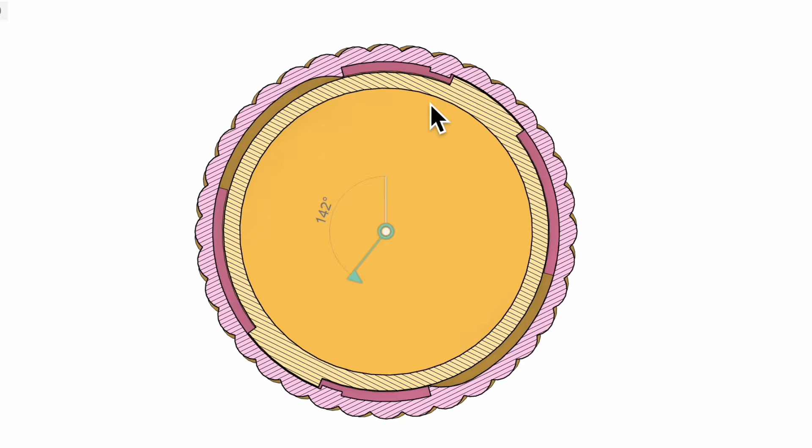I'll walk you through the mechanism, build it step by step, and show you what I learned from testing the printed versions. And stick around until the end. I'll show you how to add the same mechanism to your own model directly in the slicer in about a minute. So let's jump right in.

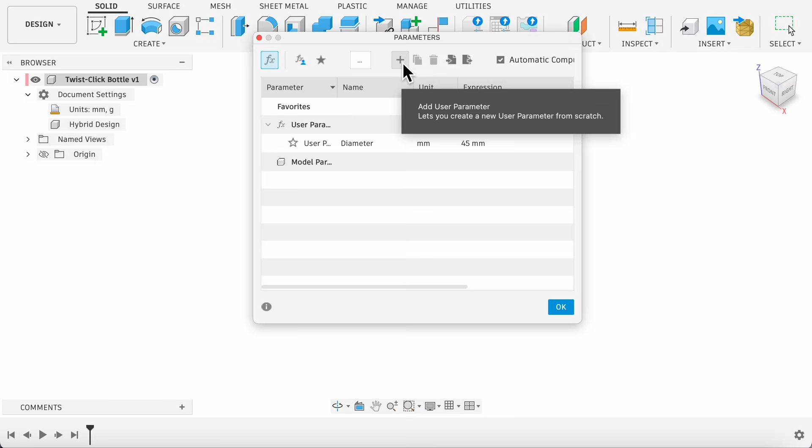First, let's define our main dimensions. Go to the Modify panel and select Change Parameters. Click that plus icon to add our first one. Diameter, 45 millimeters. Next, add height for the container and set it to 30 millimeters.

All right, now let's get started by sketching the outer profile. Go up to Create Sketch and pick the XY plane. Hit C for the circle tool. Start right from the origin, drag it out, and type in diameter. Draw another circle for the inside diameter.

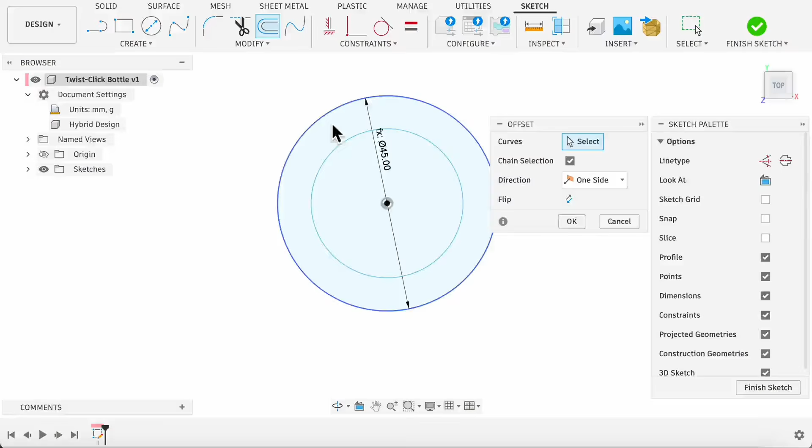Offset it outward by 1.5 millimeters to define the bottleneck. Then offset it another 2 millimeters for the lid. I'm leaving a little extra material on the lid since we'll be cutting the locking slot into it later.

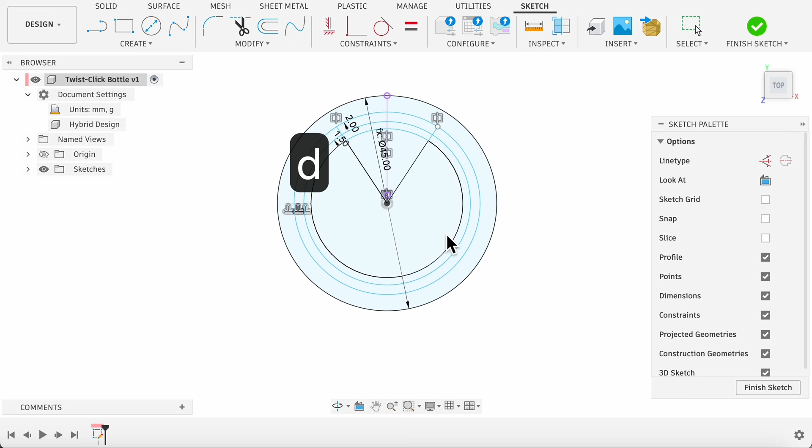Now, let's create an arc pattern for the outer profile. Start with a construction line. Go to Create and use Mirror to mirror it across the Y-axis. Press D for dimension and set the angle between these two lines to 30 degrees. Under Create, find center point arc. Draw the first curve.

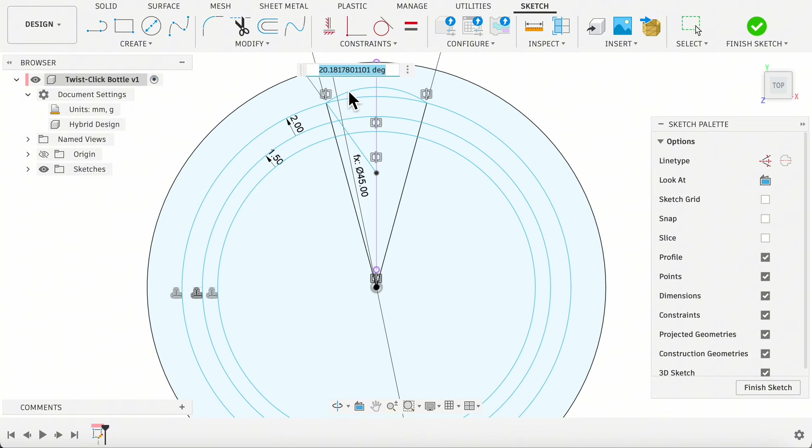Add another construction line, then set the angle to 45 degrees. Apply a tangent constraint here. When all the lines turn black, the sketch is fully constrained.

We don't need to draw every curve by hand. Go to Create and choose Circular Pattern. Pattern the arc around the center point with a quantity of 12. Each section spans 30 degrees, so 12 copies complete the full 360 degrees.

Nice and clean. To make the profile easier to select later, select all the lines that are not part of the final outline and press X to turn them into construction lines. And that finishes our outer profile.

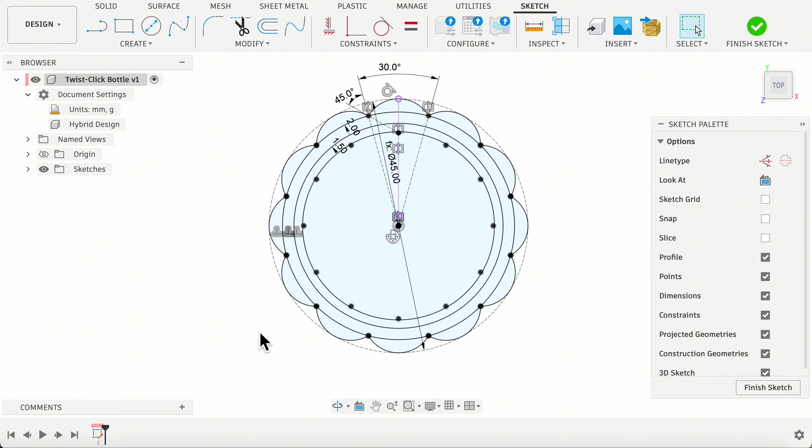Actually, I've just changed my mind. Instead of using fixed stripes in the sketch, let's make this pattern parametric so we can change it later. Open Change Parameters. Add a new parameter called stripes. Make sure it is set to no units. This parameter controls how many vertical ridges wrap around the container. I'll use 12 for now.

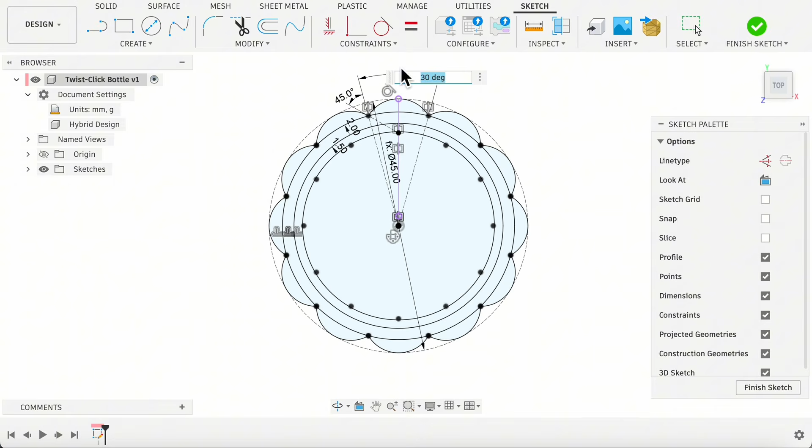Back in the sketch, change the angle to 360 divided by stripes and set the pattern quantity to stripes. Now we can change the entire look of the container by changing a single value in the parameter table. Check for that small lock icon. It means it's fully constrained. Okay, let's finish the sketch and rename it to container.

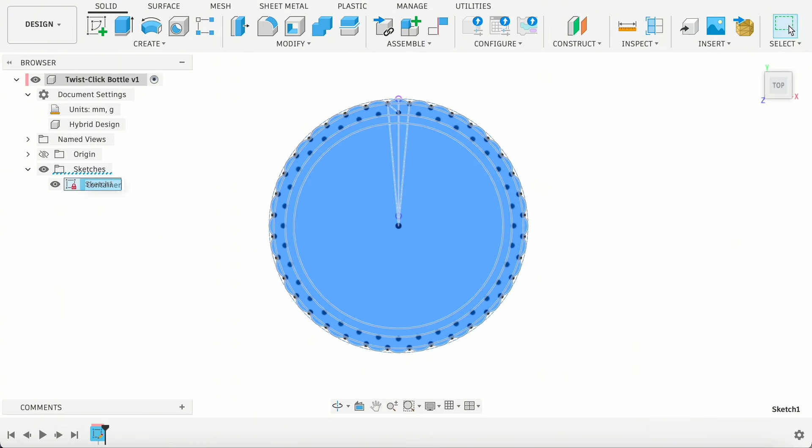Let's build the lid first. Right-click the root component in the browser and select New Component. Rename it to Lid. Press E, select the lid profiles, and extrude them upward by 10 millimeters. Turn the sketch back on.

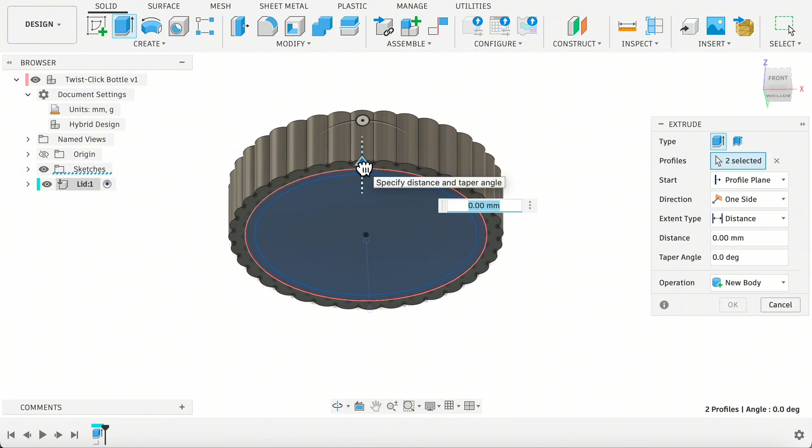Press E again, select these two inner profiles, extrude them upward by 8 millimeters, and make sure the operation is set to cut. That leaves us with a 2 millimeter thick top wall. And the lid is done.

Now let's build the container body. Create a new component named Container. Press E and select the bottle opening. Extrude it upward by 8 millimeters to create the bottleneck. Then press E again, select the body profiles,

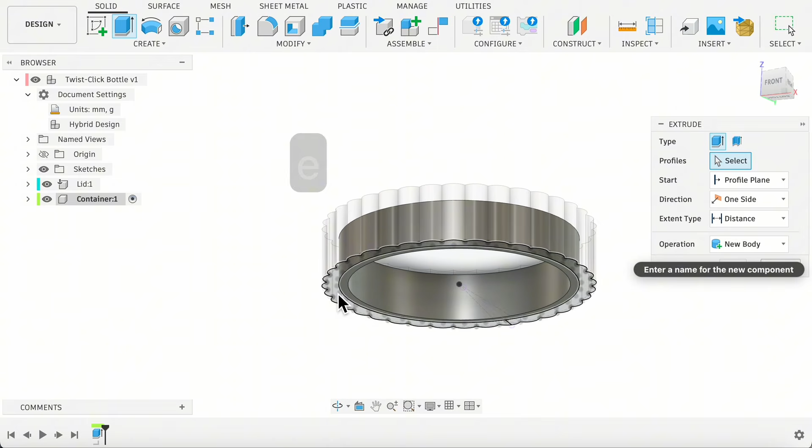and extrude downward using height minus 10 millimeters in the negative direction. The parameter height defines the total model height, so we'll subtract the 10 millimeters already taken up by the lid. Set the operation to join and confirm.

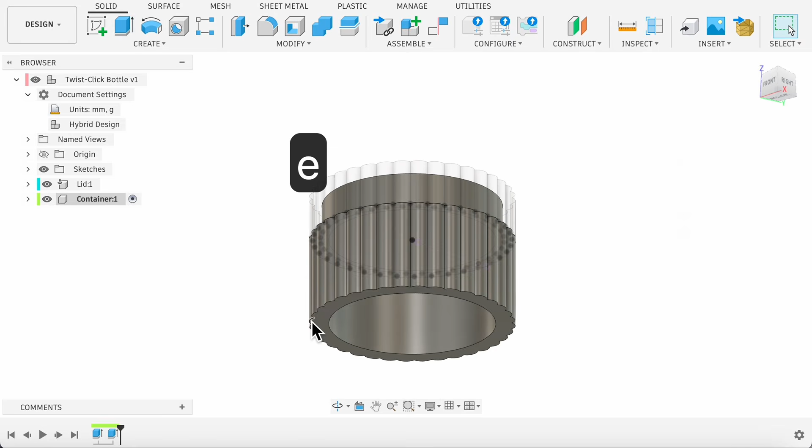The bottom is still open, so press E again. Start from the bottom face and extrude upward by 2 millimeters. Use join to close it.

Now, I'm pressing Shift plus N to turn on component color cycling. This doesn't change the material or the final print. It simply gives each component a different display color, making their relationship much easier to see.

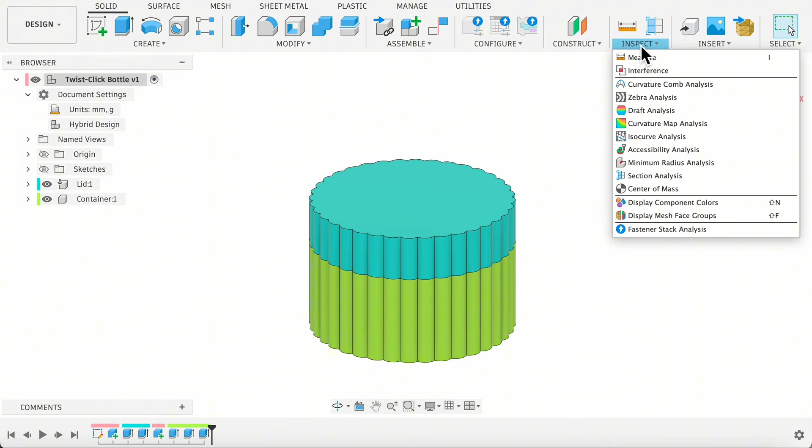To get a better look at the model, let's go to the Inspect menu and select Section Analysis. If you don't see anything, just click Flip. Right now, these two parts are just sitting face to face. We'll add the twist snap mechanism later.

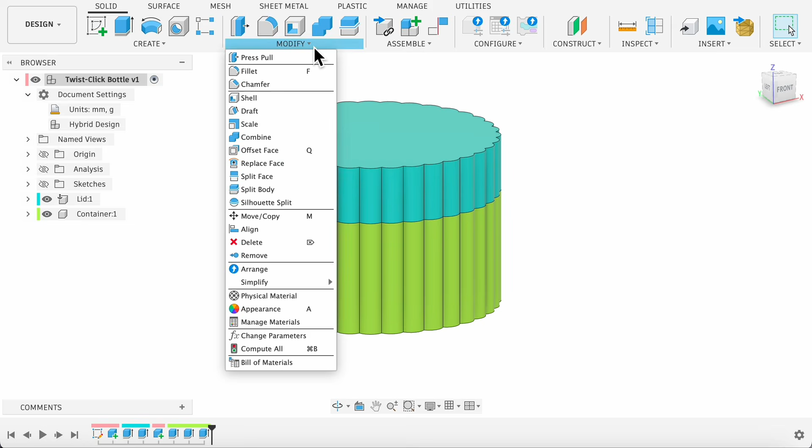Before moving on, let's think about print orientation. We'll print the lid upside down, with its top face flat on the build plate, while the bottle body prints upright. To make the bottom look more refined and avoid elephant foot during printing, I'm adding a small chamfer here. Add a small 0.6mm chamfer to the top and bottom edges.

With this many stripes, each edge is quite short, so a larger chamfer might make the feature fail. Right now, these two parts are just sitting face to face. Next, we're going to build the actual twist-snap mechanism.

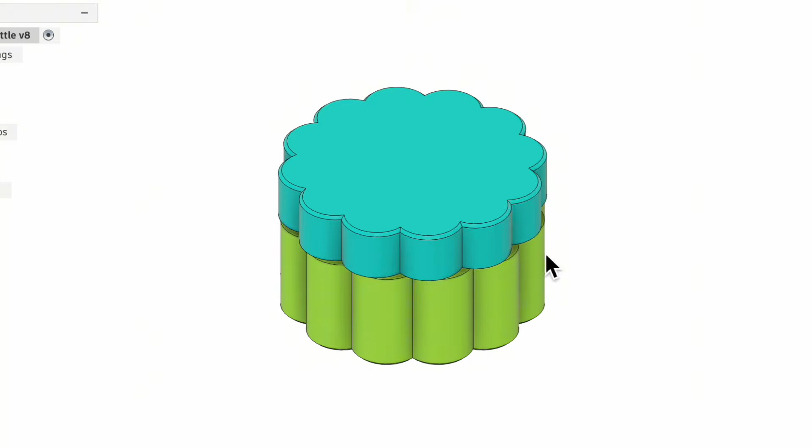Before we go any further, let's see how this twist-click mechanism actually works. First, we have a radial lug on the base part. During installation, you align this lug with the entry slot. Since the slot is slightly wider, it slides right in. Then, as you rotate, the lug follows a curved path until you hit a tiny bump, a detent.

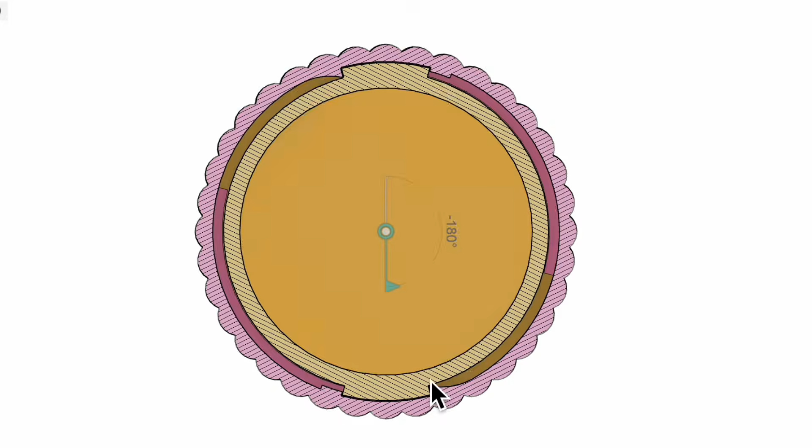With a little extra force, the plastic flexes just enough to let the lug snap over it. The moment the lug snaps past that point, you'll get clear tactile feedback. That's the click sound we're looking for. Once the lug snaps into the locking zone, there's a much higher hard stop wall right in front of it. This wall is too high to be pressed over with normal force, so the lug can't rotate any further, effectively locking it in place.

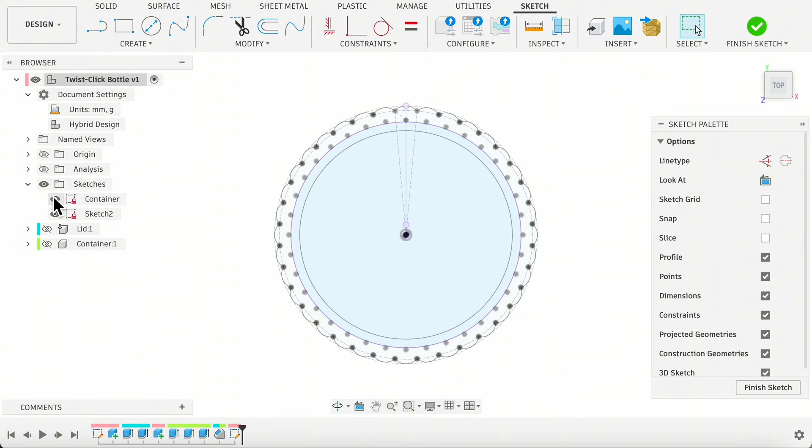All right, let's start by creating a sketch on the XY plane. Press P and project the interface between the container and the lid. Hide the container sketch for now. We'll start with the lug. Draw a line from the origin and mirror it across the y-axis. Under Create, choose Center Point Arc.

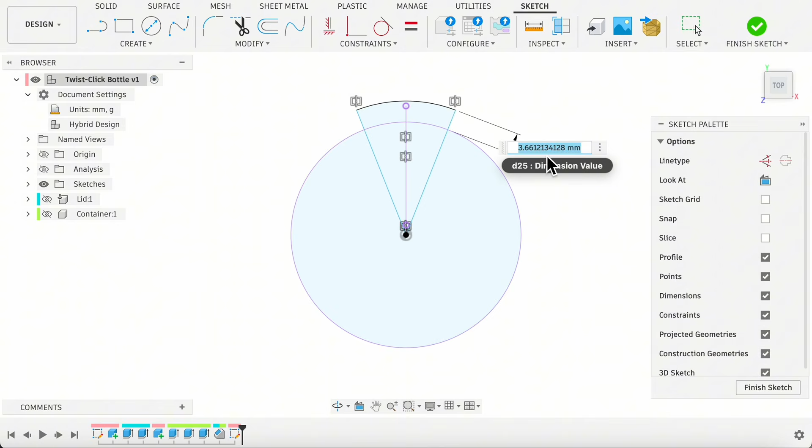Draw a short arc. Press D and set the distance between the two arcs to 1 millimeter. This defines the height of the lug. Also, set this angle to 30 degrees. Now, everything looks fully defined. Okay, let's finish the sketch and rename it to lug.

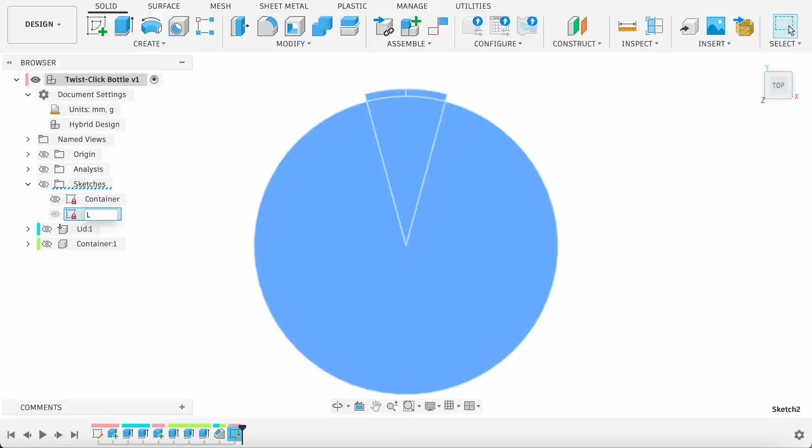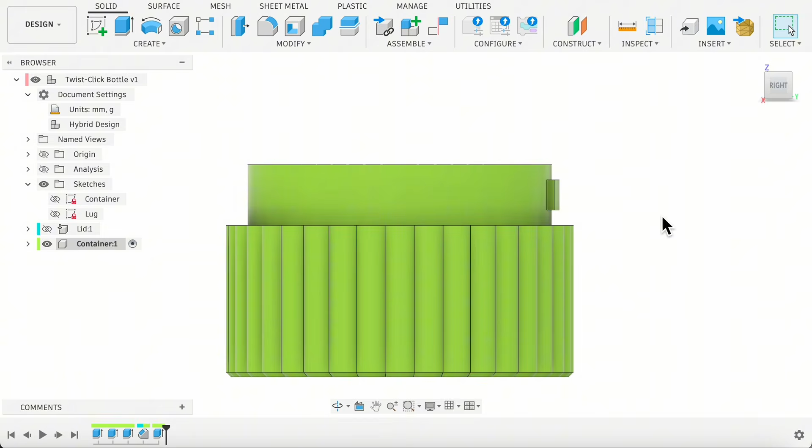Back in the container component, extrude the lug profile from a plane 2 millimeters above the sketch. Give it 4 millimeters of height and join it to the body. From the side, you can see the lug would start printing in midair, so it'll need support. To avoid that, add a 1 millimeter chamfer to the top and bottom edges. Now the lug can print cleanly on its own.

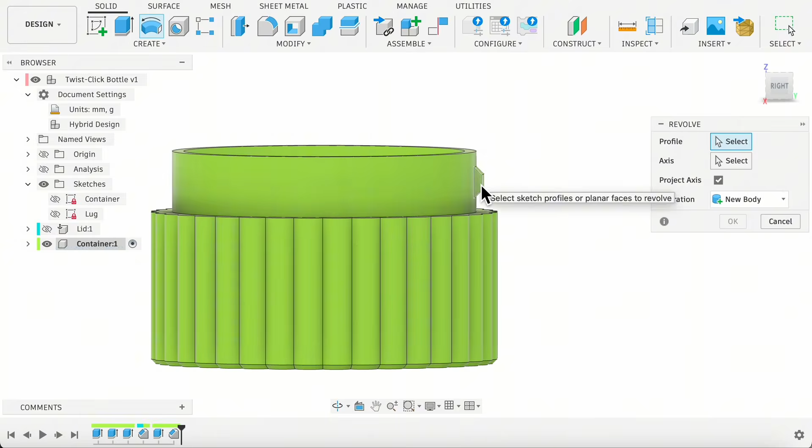Next, we'll create a matching groove in the lid. Instead of redrawing it from scratch, here's a shortcut. Use the lug itself as the cutting profile. Let's use the revolve tool. Pick the Z-axis as the revolving center. Set it to full and operation to cut.

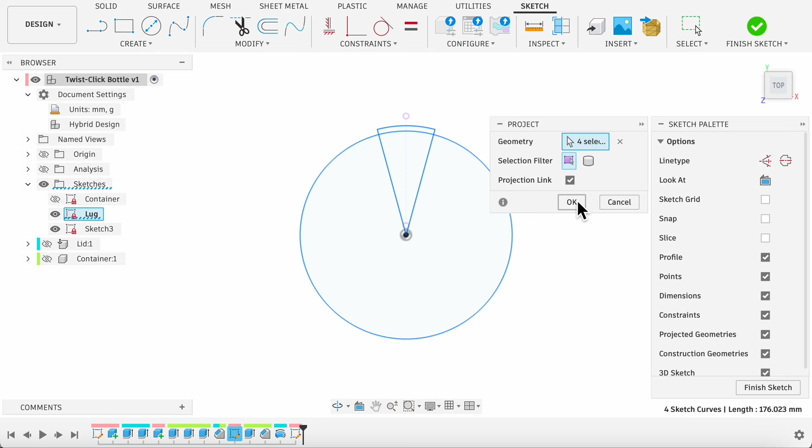The lug has room to move now, but it needs an entry slot to get started. Plus, we're still missing the hard stop here and the detent. Create a sketch on the XY plane. Press P and project both the lug and its mating surface. Then press C and draw a circle as the groove profile.

Next, we're going to draw the detent. Draw a line from the center to the edge. Then use the center point arc to snap to the center and draw a short arc. Set the detent depth to 0.4 millimeters.

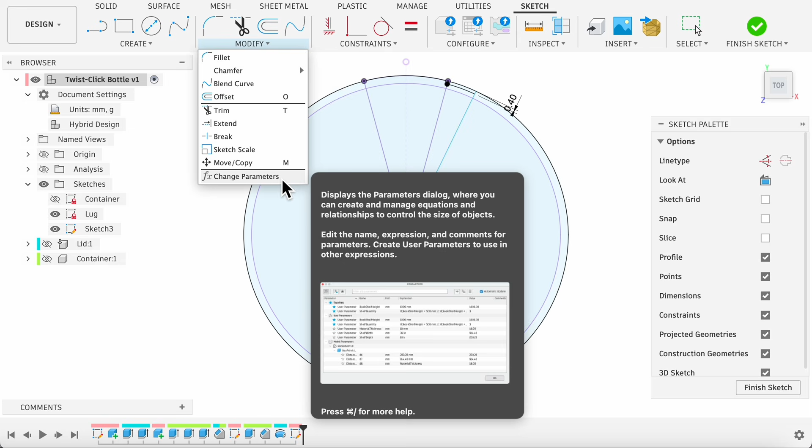I think I'll make that value parametric so the tactile snap is easy to tune later. Open change parameters, add a parameter called detent, and replace the fixed value with this new parameter. Finally, set the detent width to 2 millimeters.

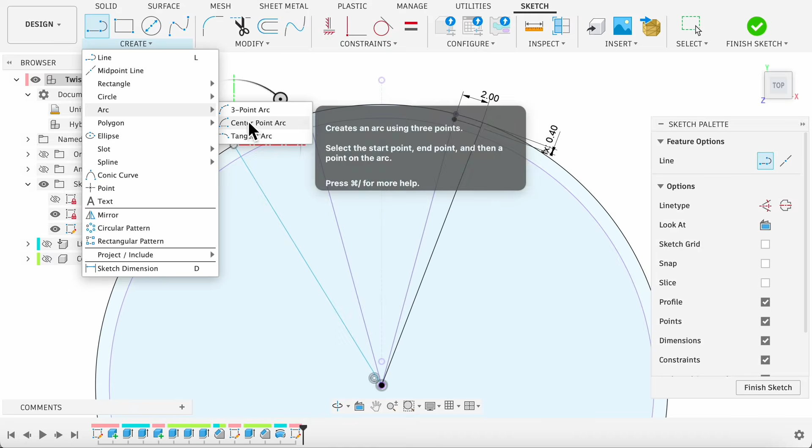Now, let's build the hard stop on the other side. Add a construction line. Draw another center point arc. Constrain the arc endpoint to the root of the lug and also to the circle. Use shortcut D to set this angle to 15. Draw one last line to define the width of the entry slot and set that angle to 45 degrees.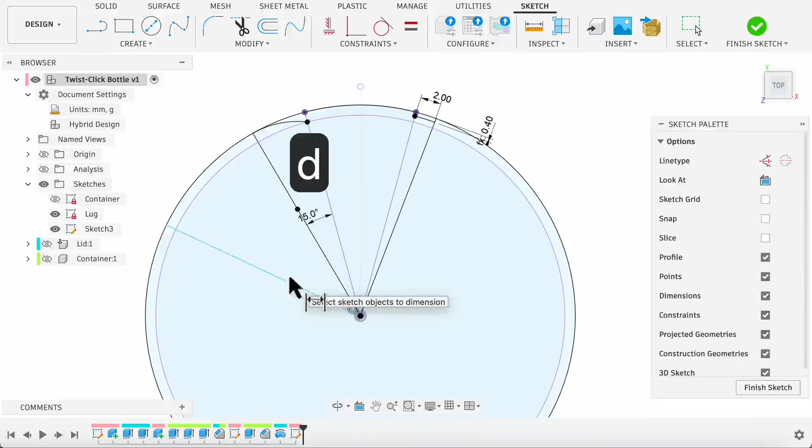Select the lines that are not part of the final profiles and press X to turn them into construction lines. Everything looks fully defined. Okay, let's finish the sketch and rename it to slot. With that sketch ready, we can turn each profile into a functional part of the slot.

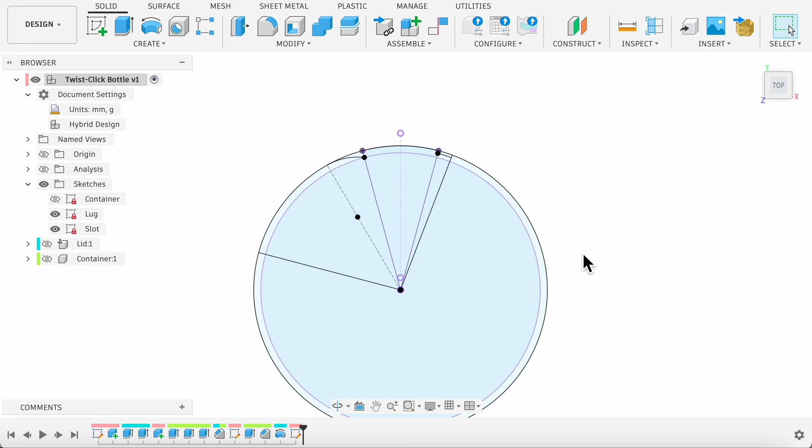Hit shortcut E to cut the entry slot. Select this profile. Set the extent type to object. Select this face as the target and set the operation to cut. That creates the entry slot.

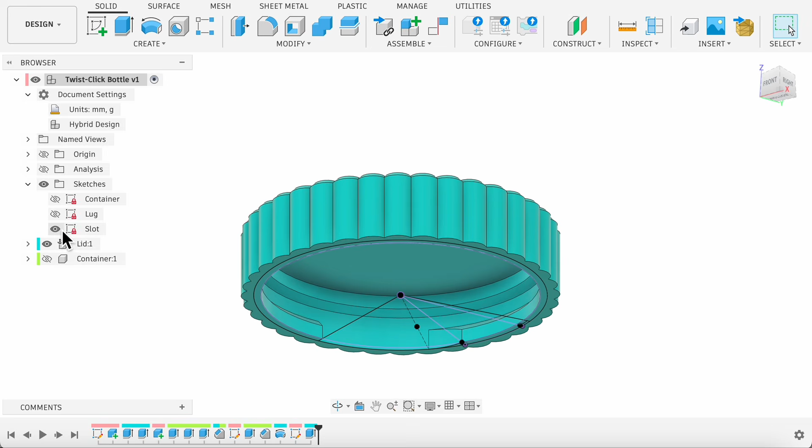To add the detent and the hard stop wall, let's hit shortcut E to extrude again. Select the small bump and the end profile. Set the start to object. Select the top face and use join.

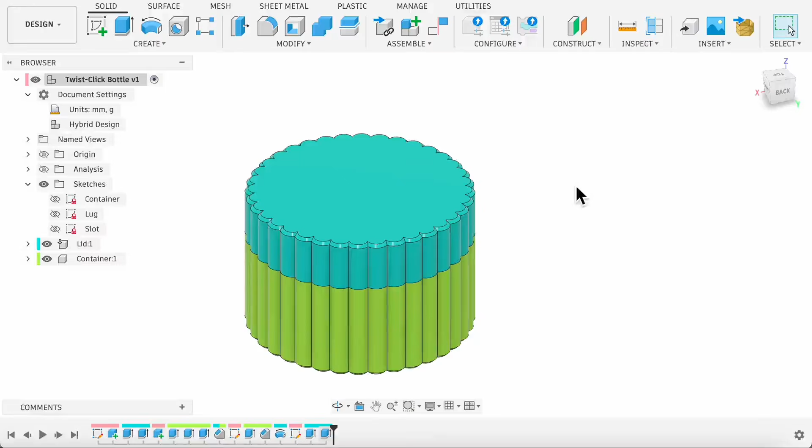To get a better look at the twist snap mechanism, let's go to the Inspect menu and select Section Analysis. Pick the XY plane and drag it up. The entry slot, detent, and hard stop are all in place, so the locking geometry is complete.

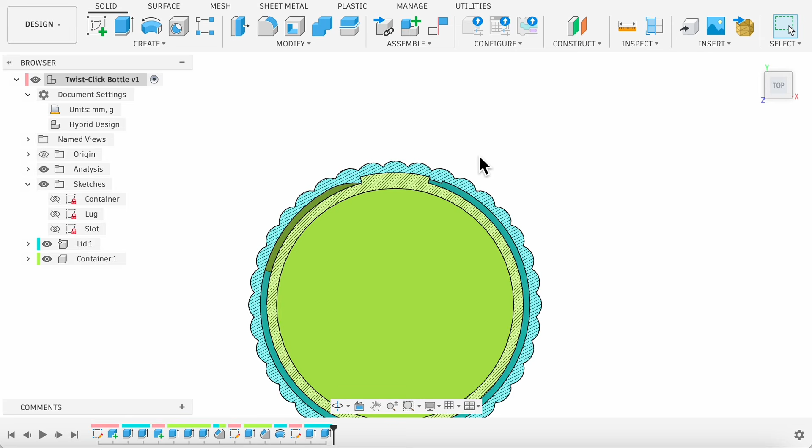But before we print anything, we need to add some clearance between the moving parts. Let's start with the lug on the container body. Grab the offset face tool or hit shortcut Q and enter -0.1 millimeters. Then hit F for fillet, add a 0.5 millimeter fillet to the lug edges to make it glide easily in that groove.

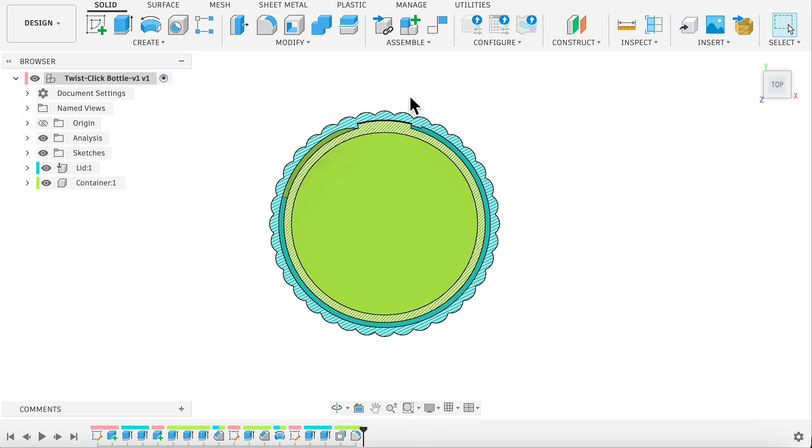And just like that, our twist snap mechanism is finished. With only one locking point, the lid could pivot around it and all the twisting load would be carried by a single lug. We want support on both sides, but luckily we don't need to model the whole mechanism twice.

Let's head up to Create, then Pattern, and grab the Circular Pattern tool. Make sure your object type is set to Features, because we want to grab those specific steps from our timeline. The steps that create the entry slot, the hard stop, and the detent. Pick the Z-axis as your center, and set the quantity to 2.

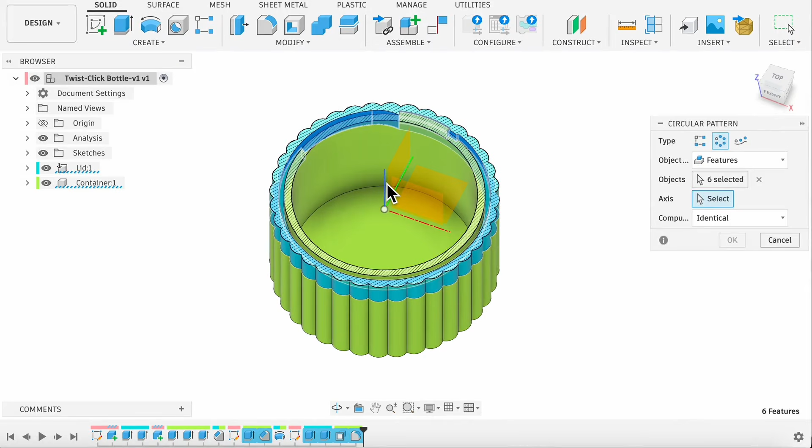For a lightweight project like this, 2 lugs are plenty. It's clean, symmetrical, and gets the job done. Of course, you could always crank up the quantity in that circular pattern to 3 or 4, but honestly, 2 is just enough. Now let's isolate the lid and add clearance there as well.

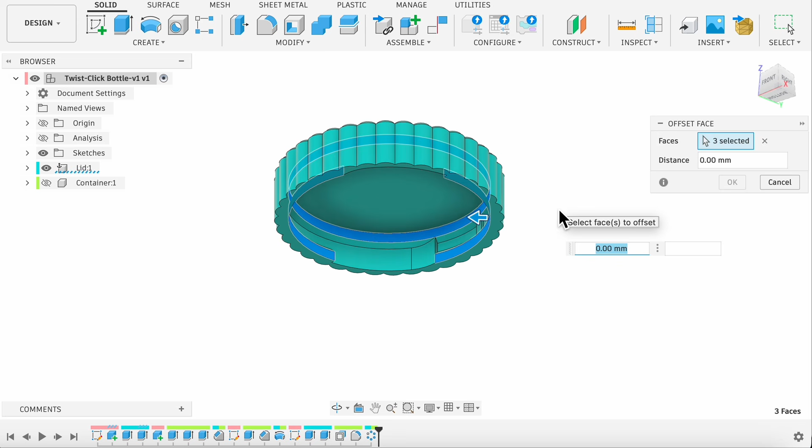Press Q, select the mating surface around the bottle neck, and offset it inward by 0.1 millimeters. Let's take another look with the section analysis. Now there's clearance between the lid and the bottle body. Let's assemble the parts so we can test the motion properly.

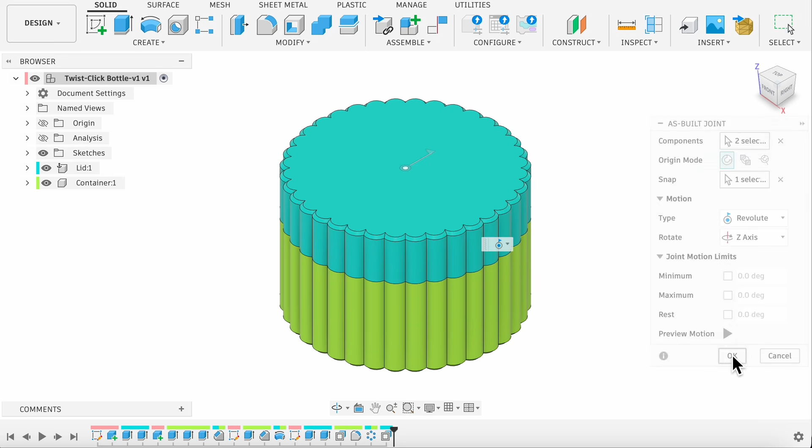Go to Assemble and choose As-Built Joint. Select the lid and the bottle. Set the motion type to revolute. Choose the center axis. Turn the section analysis back on. Now drag the lid to see how everything moves.

As you rotate, the lug follows the groove until it hits a small bump. With a little extra force, it snaps right over that detent with a satisfying click. Now it's in the locking zone, stopped by a higher wall and locked perfectly into place. With the modeling finished, now we get to my favorite part, the magic of parametric control. This is where all that setup finally pays off.

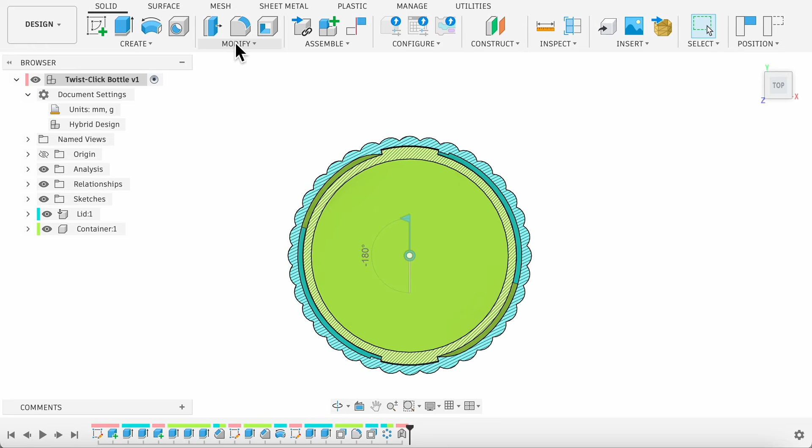Open the parameter table. Let's start with detent. This one controls how the twist snap clicks into place. If the detent is too low, it'll twist in too easily, but it might be too loose to stay locked. If it's too high, it'll be hard to twist. You might need way too much force, or it might not clear at all.

Now let's look at the other parameters. Diameter changes the overall width. Height changes the overall height. Because the lid stays fixed at 10 millimeters, most of that height change happens in the bottle body. The stripes parameter is the interesting one. Lower values create broad petal-like lobes. Higher values create finer vertical ribs. I'll use a smaller set of dimensions for a faster test print.

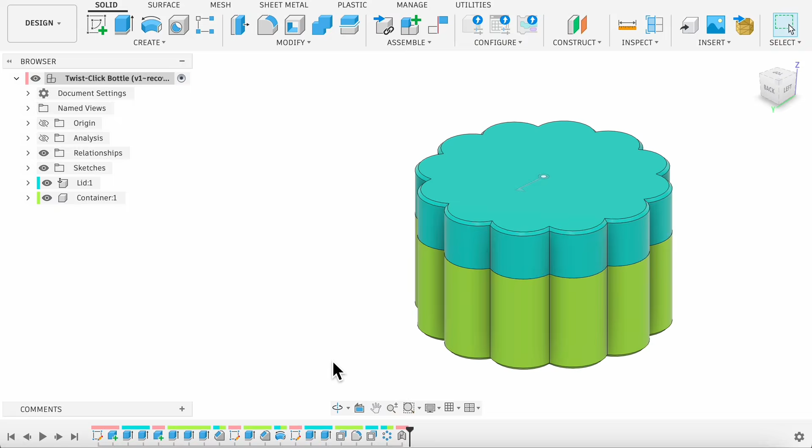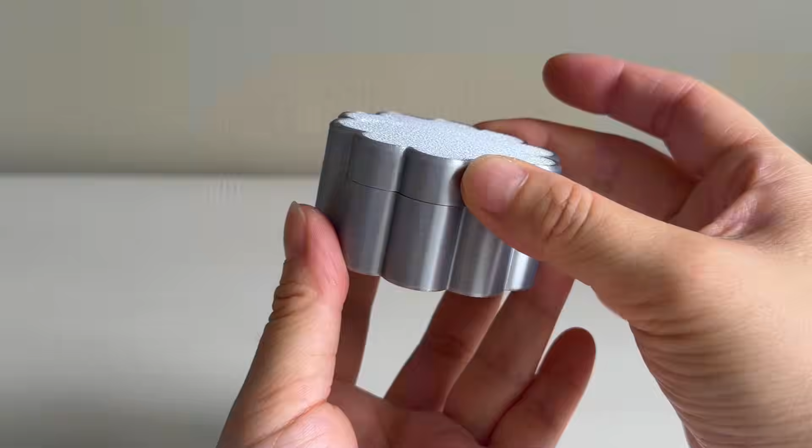Here's the final print. Let's try the mechanism. Align the lug with the entry slot and rotate. Right here, I'm feeling a bit of resistance. Give it a tiny bit of force, and with a satisfying click, it locks right into place. But listen to this, it rattles. I only added 0.1 millimeters of clearance, and I couldn't find anything wrong with the model.

So I printed the exact same model in a different filament. And suddenly, the fit was perfect. Same model, different filament, totally different feel. So materials shrink and flow differently. You may need to tune the clearance for your own printer and filament.

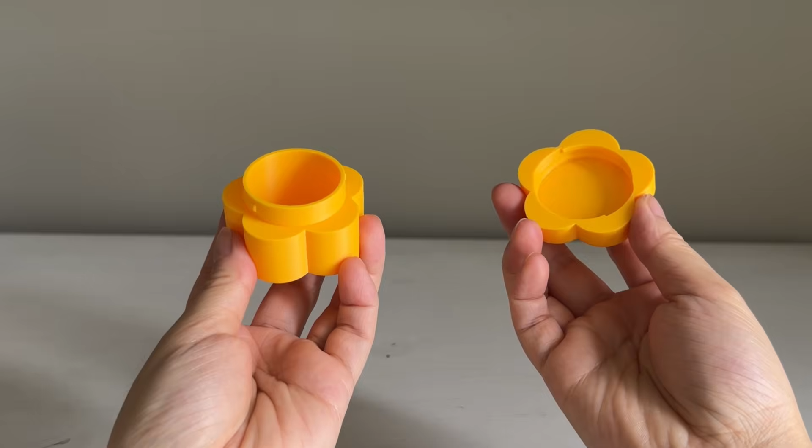I also printed a 5-stripe version, which looks more like a flower. But something strange kept happening. Sometimes the petals lined up perfectly after the click, and sometimes they didn't. So I went back to Fusion to find out why. If this lug enters the intended slot, the lid rotates into perfect alignment.

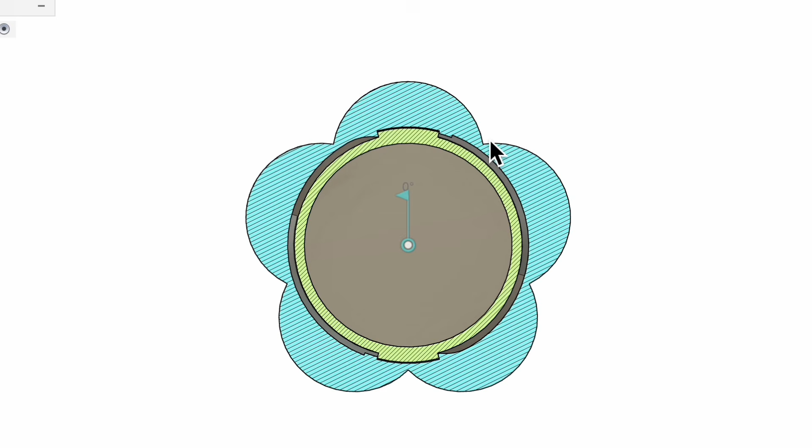But because the two locking interfaces are directly opposite each other, the same lug can also enter from the other side. With 5 stripes, the lid still locks, but the petals end up misaligned. It might seem like a tricky problem, but the solution is surprisingly straightforward. Break the symmetry so there's only one way to put the lid on, and the actual edit only takes a few steps. Double-click the circular pattern in the timeline.

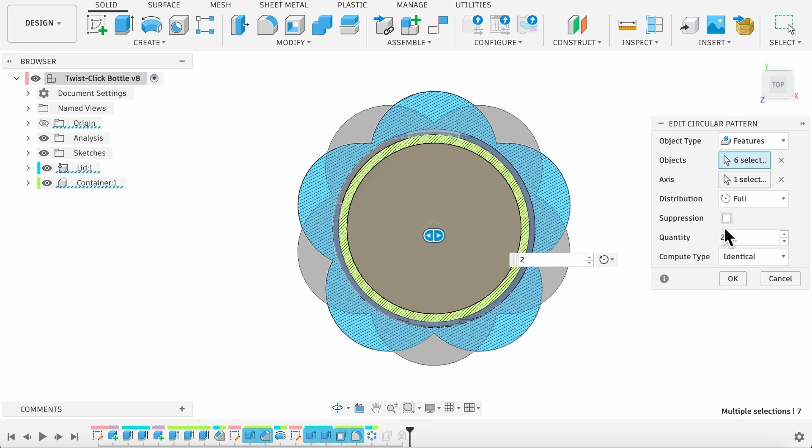Instead of distributing the two mechanisms evenly, switch distribution to partial and set the angle to 170 degrees. That changes the angle between the two mechanisms from 180 to 170. We don't want to shift it too far, though, or the lugs won't distribute the load as evenly. Let's check if the alignment works now.

Our goal is for this lug to enter here, rotate through the slot, and lock here. So let's line it up with this entry slot. But the problem is, the opposite lug is not lined up with its entry slot. In other words, the entry slot is on the wrong side.

Because the lid twists into the joint from the opposite direction, this matching slot needs to be at negative 170 degrees. So, let's go back to the circular pattern. In the selected features, remove the entry slot extrude.

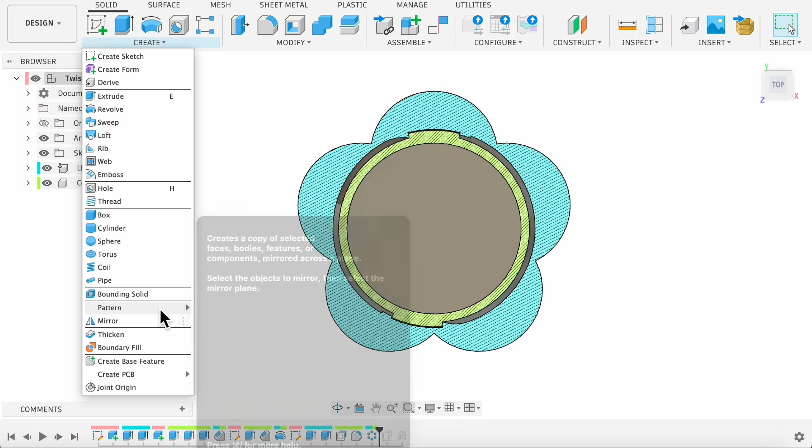Then create a separate circular pattern for the entry slot. Select that extrude in the timeline and use the Z-axis. Set distribution to partial, and importantly, enter negative 170 degrees.

Now let's check the alignment again. The slots are here and here. Notice that the one on the right has moved from here to here. When this lug enters its slot, the lug on the opposite side lines up at exactly the same time. Now both can enter and rotate all the way into the locked position.

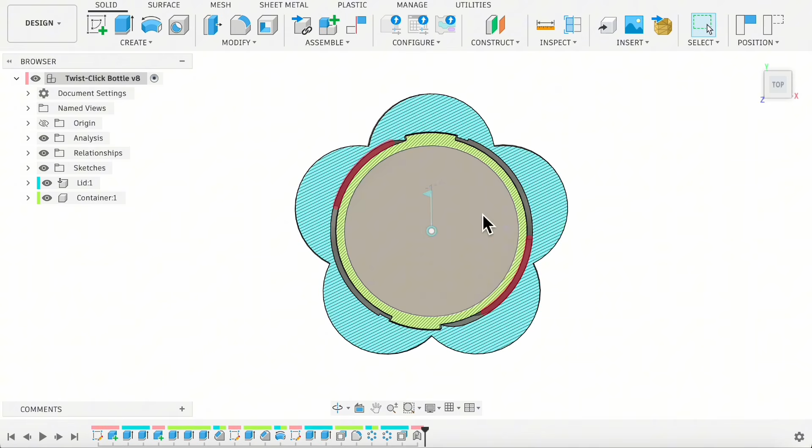If you try the other entry slot, one lug can start to enter, but the other lug hits a wall, which is exactly what we want. The opening is still a little generous, though, and with enough force, it might still squeeze in. So for better foolproofing, we should narrow the entry slot so the lid simply can't assemble in the wrong position.

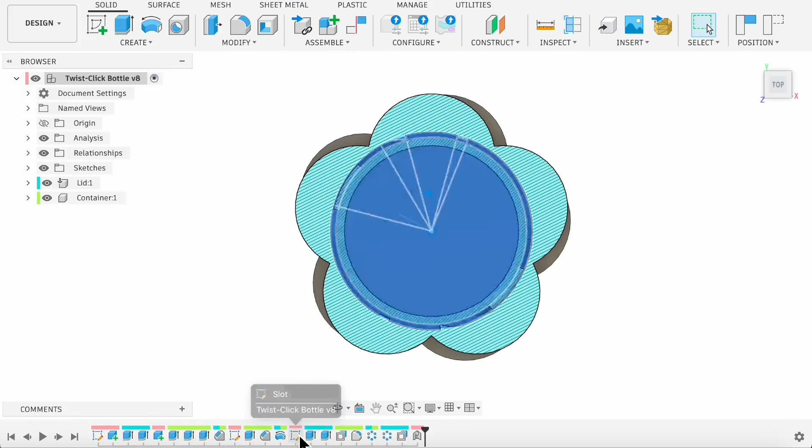Go back to the timeline and edit the slot sketch. Make the entry slot smaller, like change it to 35 degrees. That's just wider than the 30-degree lug, but not wide enough for the lid to slip in from the wrong position. Now, the entry slot is tighter than before. If we check it, these two lugs cannot enter the slots at the same time from the wrong position. But when they rotate to the intended position, both sides line up and lock into place.

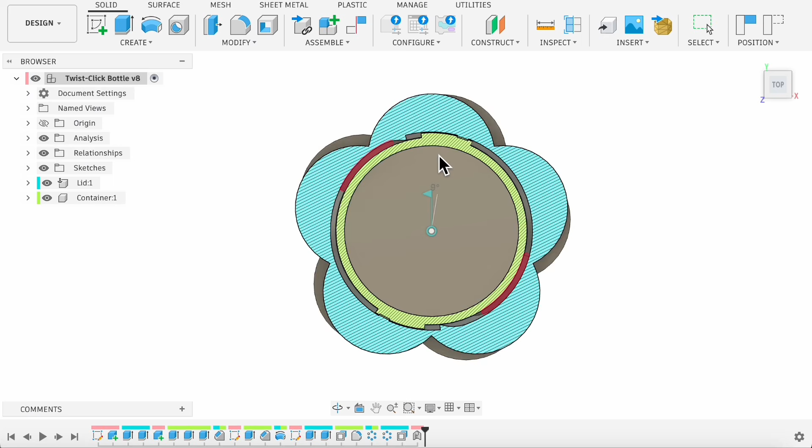Here's the updated print. At first glance, it looks almost the same. From this angle, though, you can see the change. The two interfaces aren't directly opposite each other anymore. Let's see if it works. Perfect. Now there's only one valid way to assemble it.

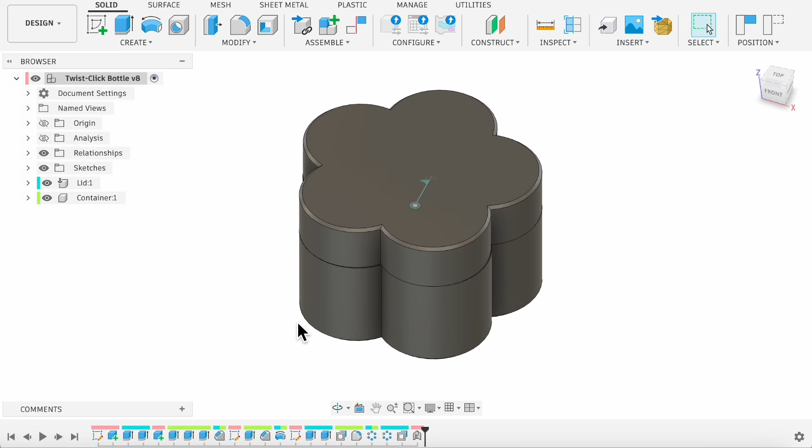This mechanism finally works, but I know rebuilding it from scratch for every new project would be tedious. So I created a twist snap cutter and uploaded it to MakerWorld. Let me quickly show you how to use it. Here I've got a solid elliptical container measuring 60 by 50 by 30 millimeters. Instead of rebuilding the twist snap mechanism from scratch, I'll use the cutter to add it. Let's go back to MakerWorld and customize the cutter to match those dimensions.

We'll start with inner diameter. Measure the narrowest part of the cutting surface, then subtract at least 7 millimeters. So 50 minus 7 gives us 43 millimeters, and a slightly smaller value is fine too. Next is detent depth. Think of it as the size of the little speed bump the lug has to cross. Larger means a stronger click and more turning force. I'll keep the default 0.4 millimeters.

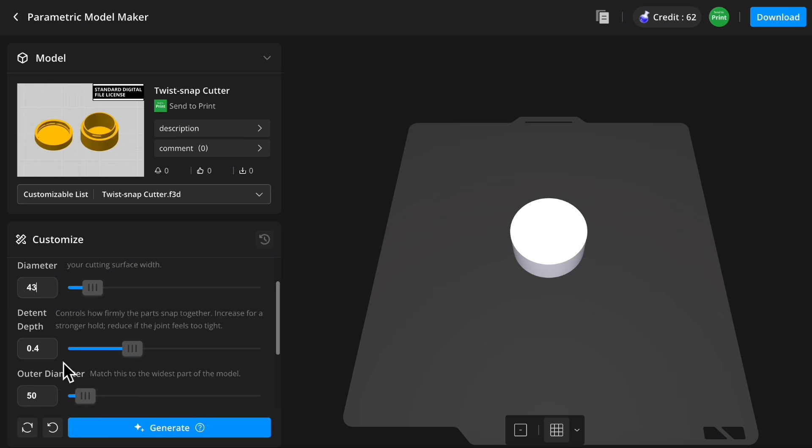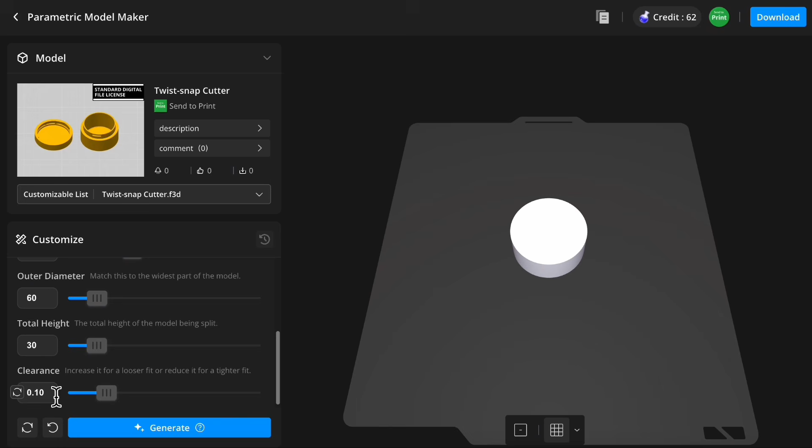Outer diameter should match the widest part of the model. Our cross section is 60 by 50, so enter 60 millimeters. Total height is simply the full height of the model, so enter 30 millimeters here. Finally, clearance controls the fit between the moving parts. The default 0.1 millimeters is a good starting point. If the fit is too tight, increase the value slightly. If it's too loose, reduce it down to a minimum of 0.05 millimeters.

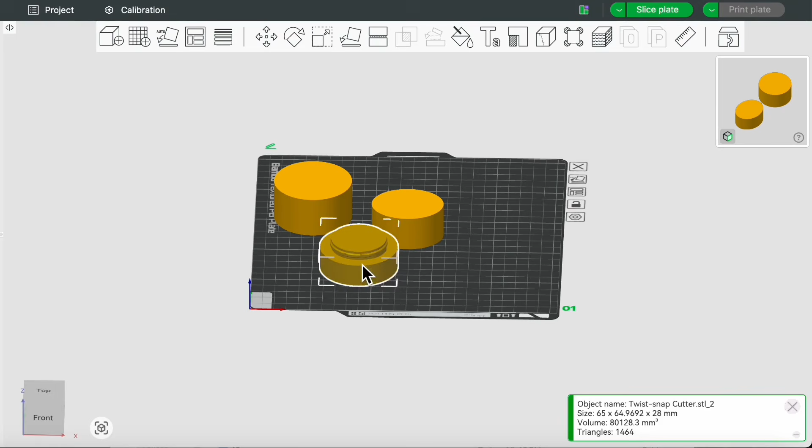Okay. It may look like nothing changed. Don't worry, the important geometry is hidden inside. Just download the file and put it to work. Back in the slicer, drag in the STL. Then right-click and choose Split to Objects. The cutter is made of two separate parts, one for cutting the lid and one for cutting the body. These are the two cutter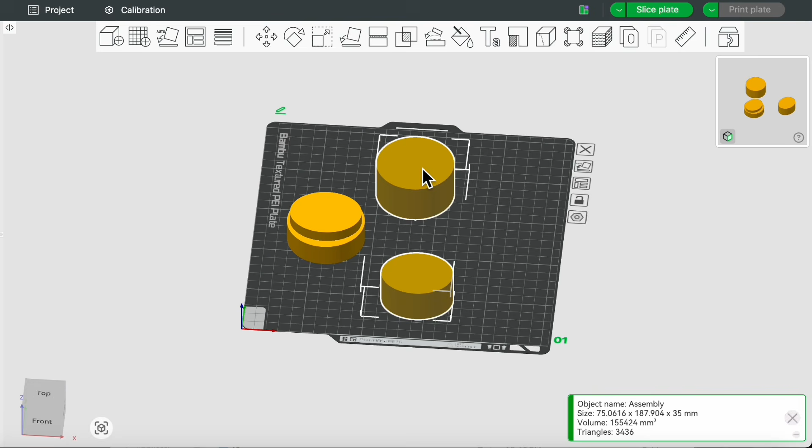parts. Duplicate your container so you have one for the lid and one for the body. Then group each copy with its corresponding cutter part. Next, align the two objects inside the first group. Right-click and center them along the X direction, then the Y direction. Do the same thing for the second group.

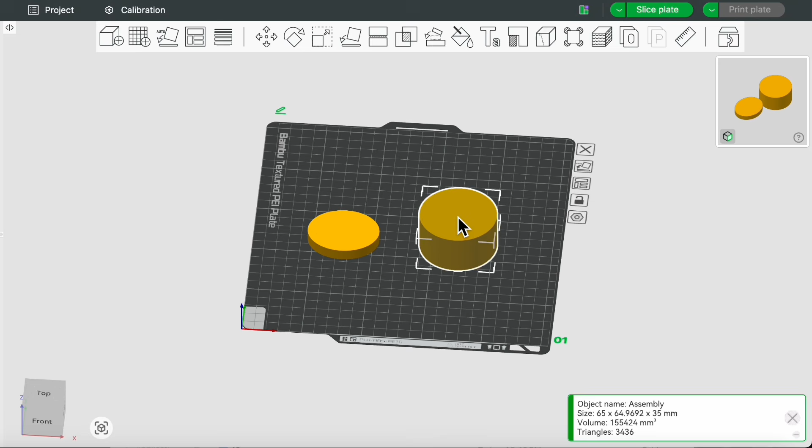Now we can run the Boolean operation. Select the group on the left and set the operation to subtract. Make sure the container is part A and the cutter is part B. Leave Keep Original Models unchecked because we won't need those copies afterward. The lid is done. We'll inspect it after cutting the body. Select the other one and run Subtract again. If the model and cutter are assigned to the wrong sides, simply swap part A and part B.